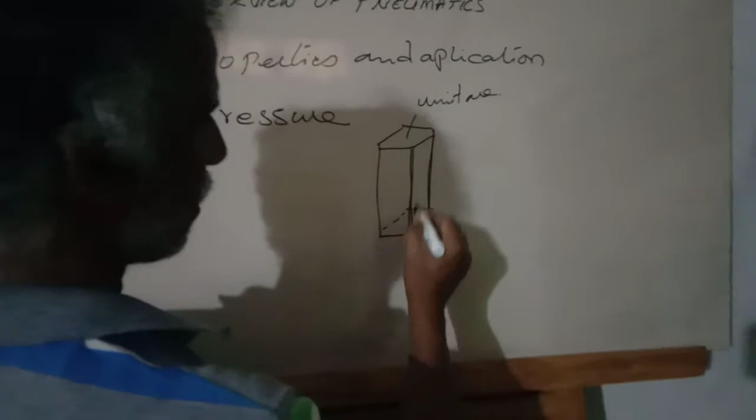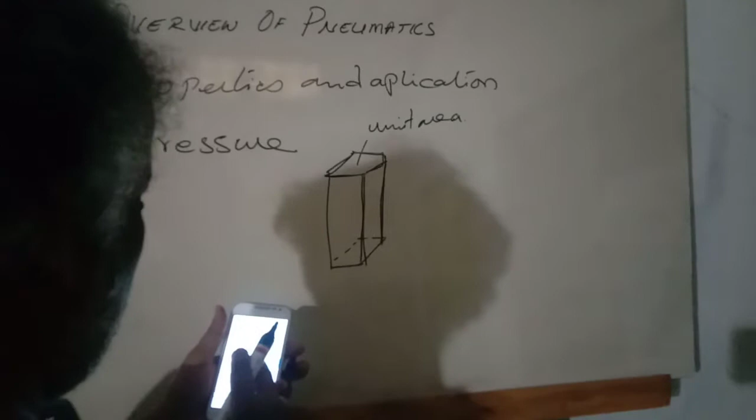Example: this is unit area. If it is a piston, a square piston or a round piston, the area is called unit area. The weight of air in the column applies a pressure. So when you put the load, the column applies pressure to the unit area. When you apply the load to this unit area, the pressure in it increases.

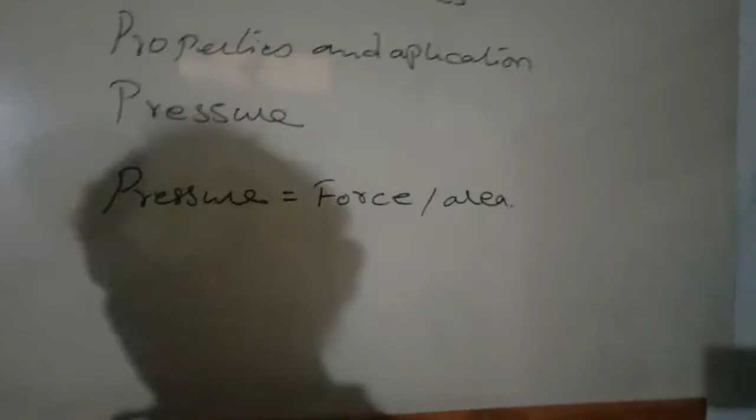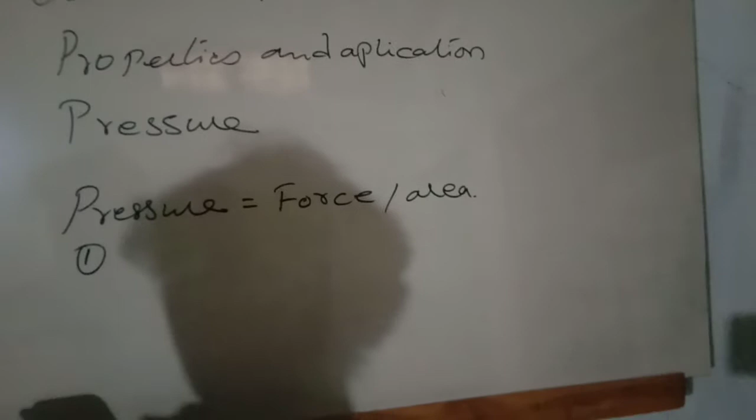Pressure is equal to force by area. The pneumatic system has three terms related to pressure that are commonly used. One is atmospheric pressure, pressure equals force by area, and we have three commonly used terms: atmospheric pressure, and the others.

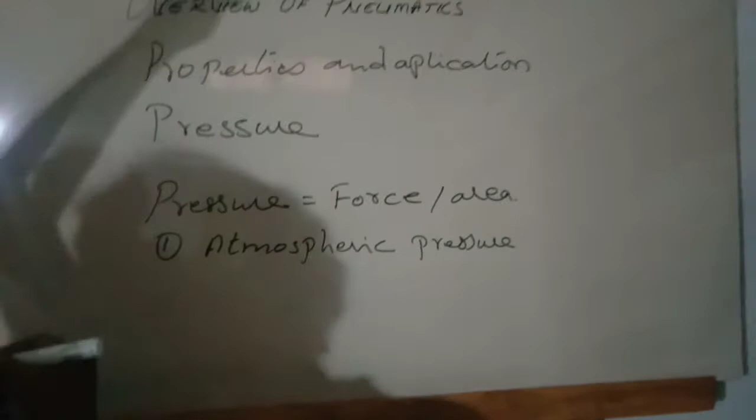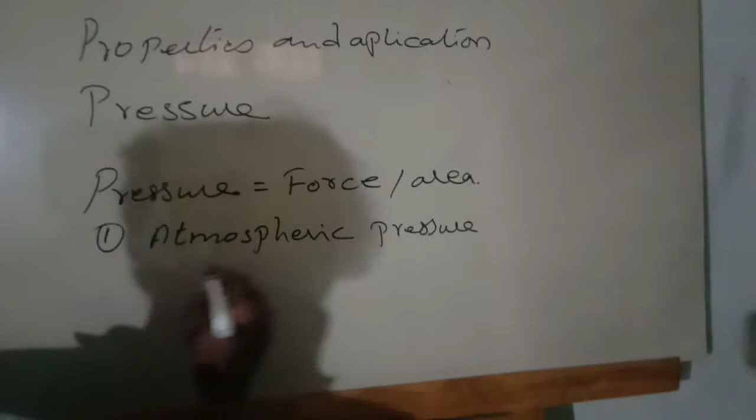Atmospheric pressure: it is a pressure caused by the weight of a column at atmospheric level, air acting on the surface. Example: you take a bucket, put water in it, and put one pipe. Due to the atmospheric pressure, water will come out.

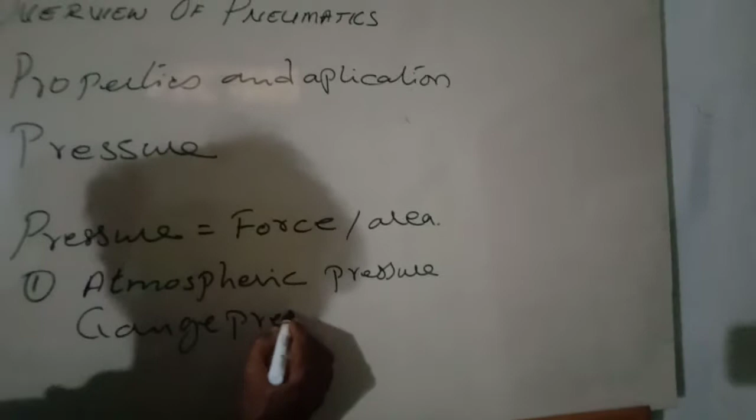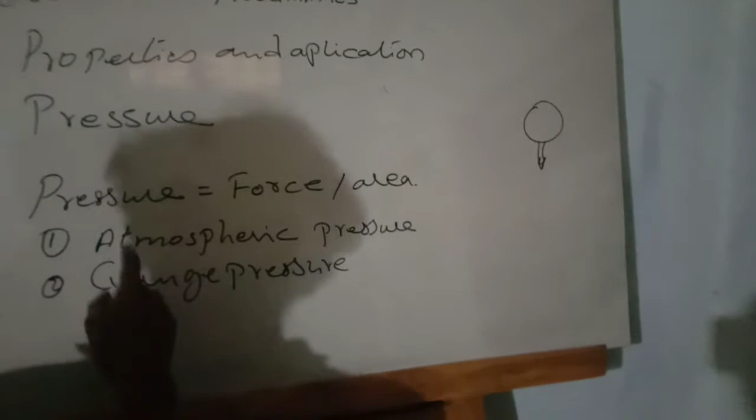Gauge pressure. For example, when you use a dial gauge in the workshop, a similar gauge pressure will be there. In the house where we have a municipal water connection, they put a gauge to check how much water pressure is coming. So this application includes three terms: one is atmospheric pressure, second is gauge pressure, third is absolute pressure.

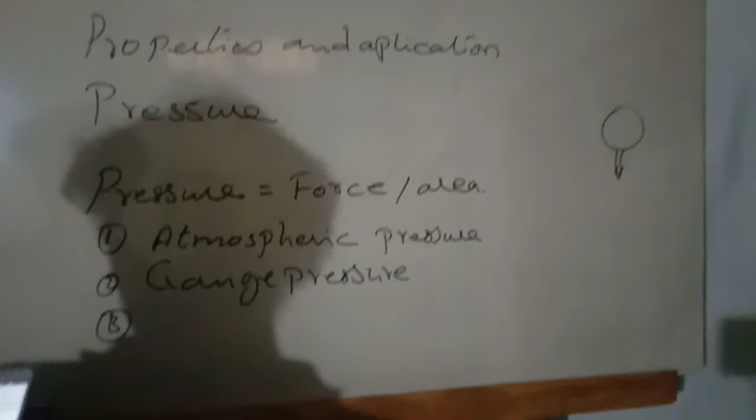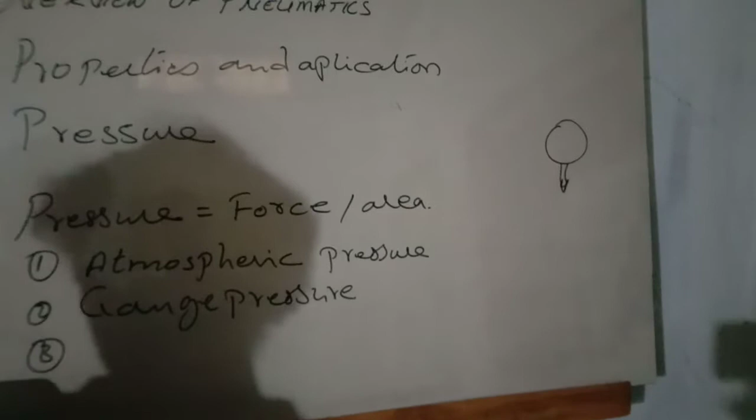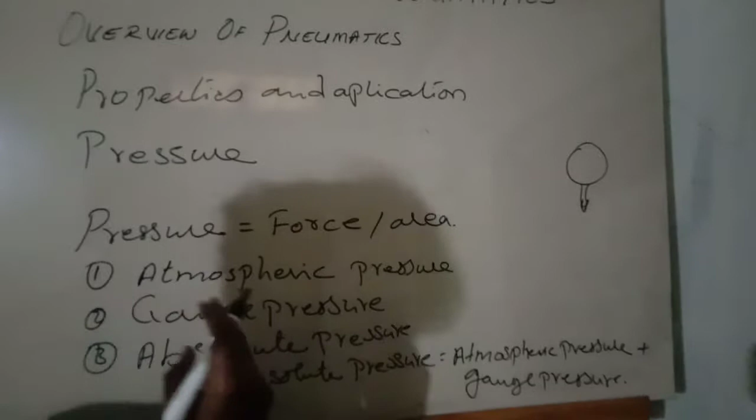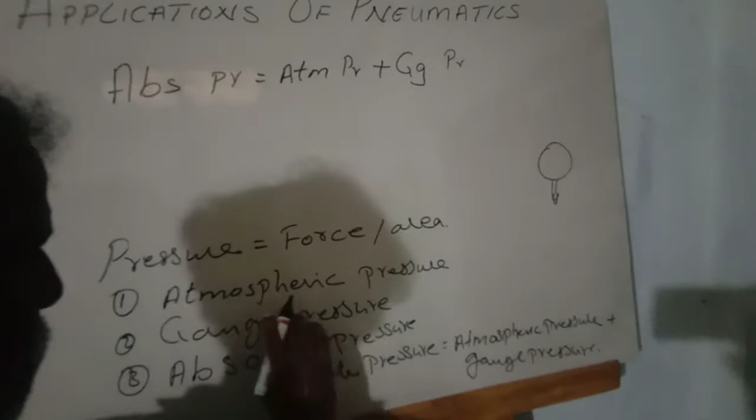Absolute pressure is equal to atmospheric pressure plus gauge pressure. Three terms: atmospheric pressure, gauge pressure, and absolute pressure. When you use the applications of pneumatics, these three terms are useful to calculate how much work can be done by the machine.

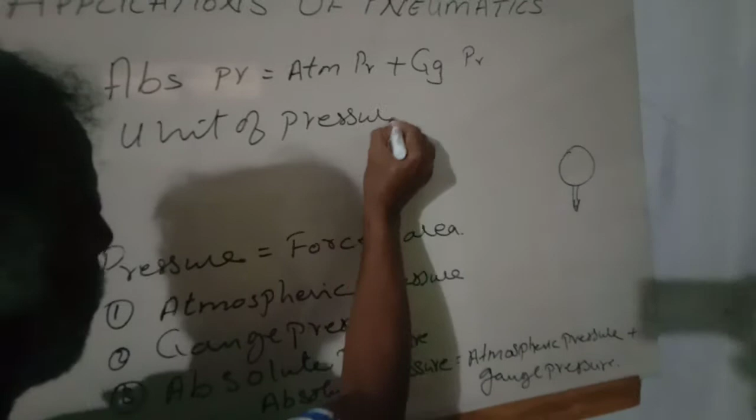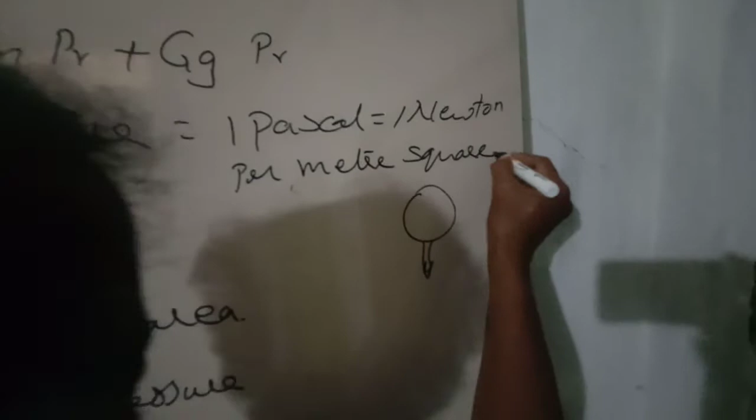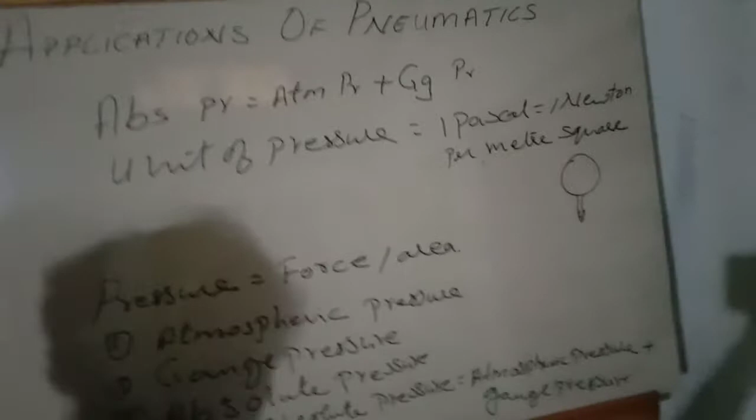Now, the unit of pressure is Pascal. 1 Pascal is equal to 1 Newton per meter square. 1 Pascal is the pressure exerted by a force of magnitude 1 Newton perpendicularly upon an area of 1 square meter, when the weight is acting perpendicularly.

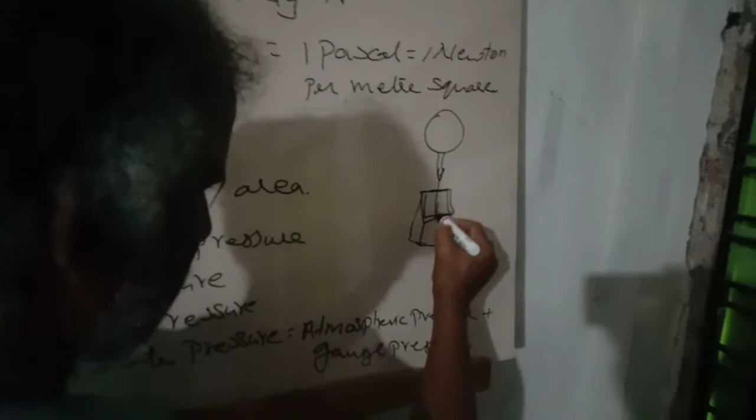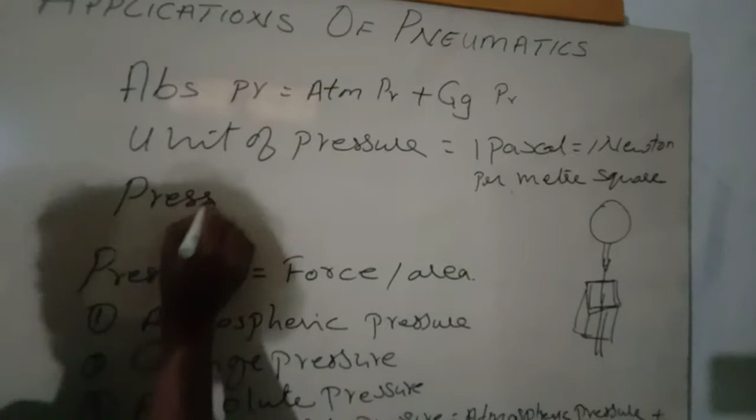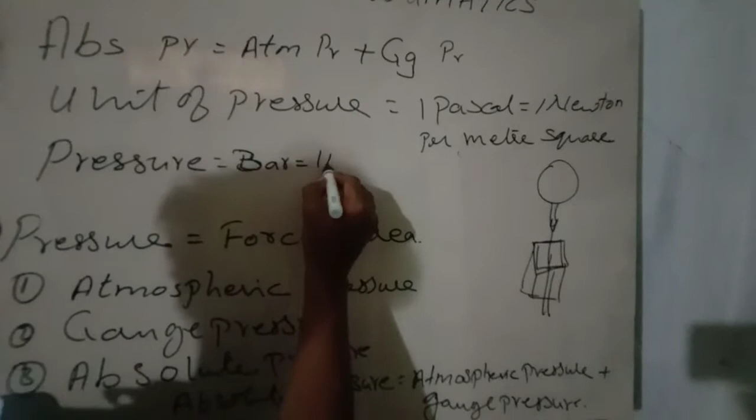Now, pressure: 1 bar is equal to 1 kg per centimeter square, approximately.

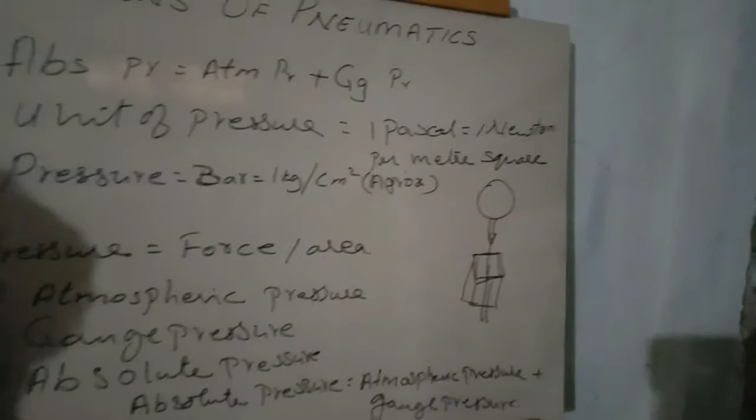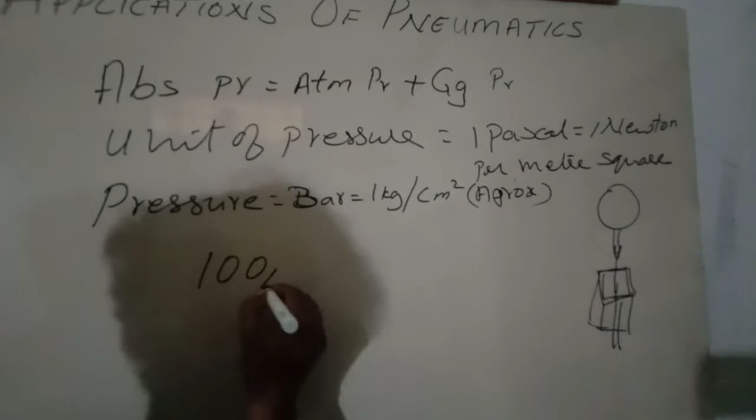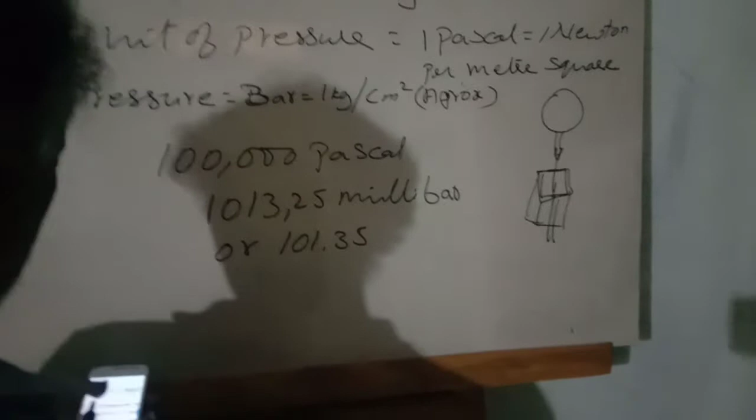Bar is a metric unit of pressure equal to 1 lakh pascals. Standard atmospheric pressure at sea level is 1013.25 millibars, or 101.35 kilopascals.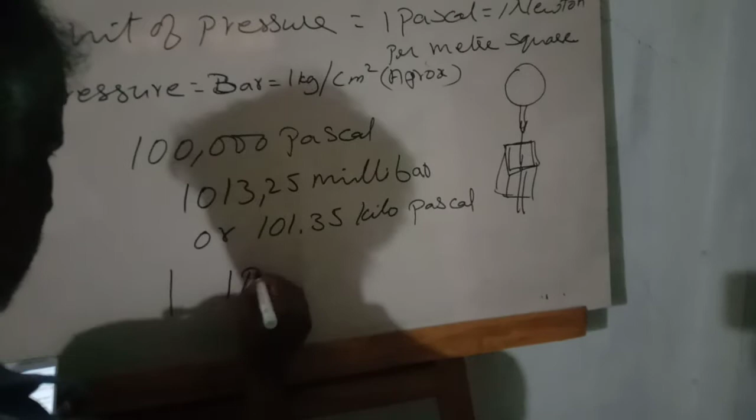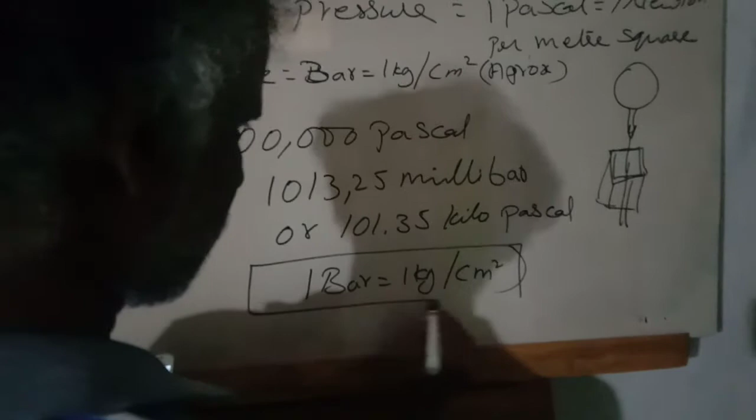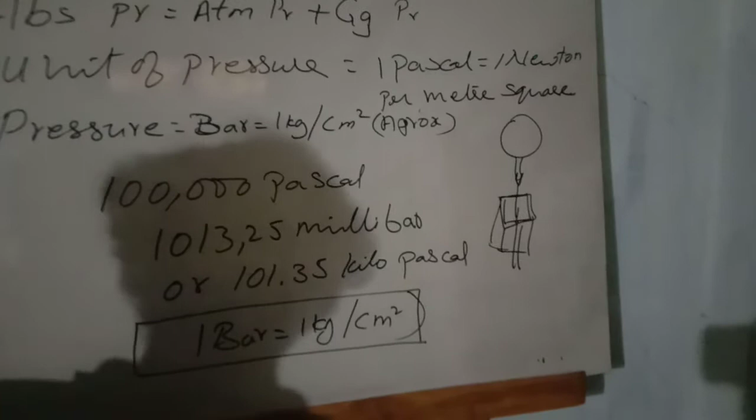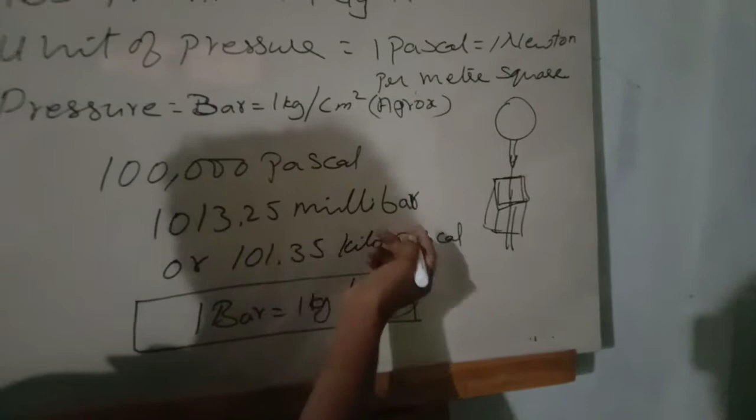One bar is equal to 1 kg per centimeter square. Bar is a metric unit of pressure equal to 1 lakh pascals. Standard atmospheric pressure at sea level is 1013.25 millibars, or 101.35 kilopascals. One bar is equal to 1 kg per centimeter square.

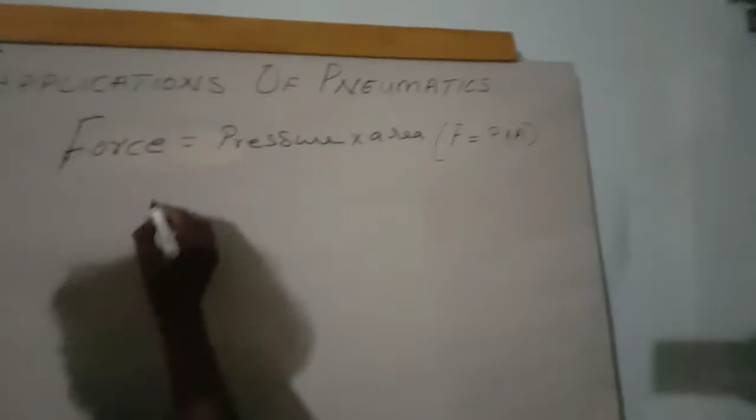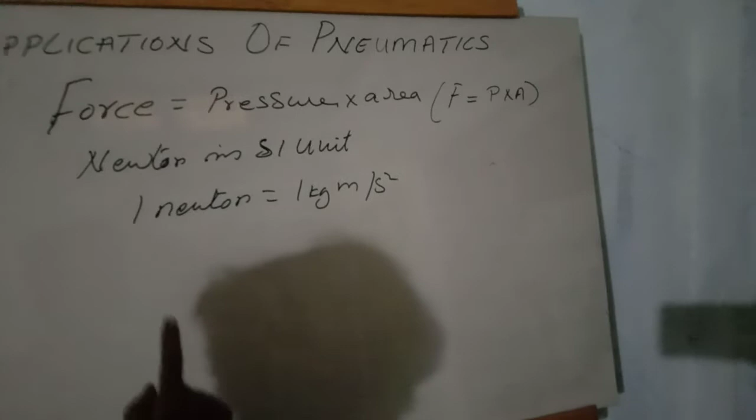Now, force. Force is equal to pressure into area, that is, F is equal to P into area. Unit of force is measured in Newton. Newton is SI unit. 1 Newton is equal to 1 kg meter per second square.

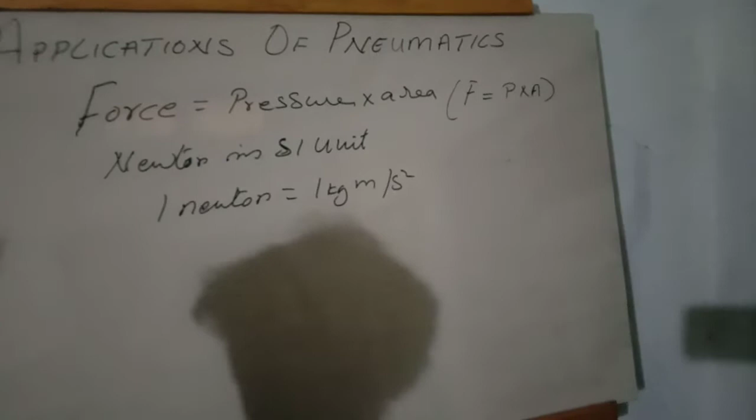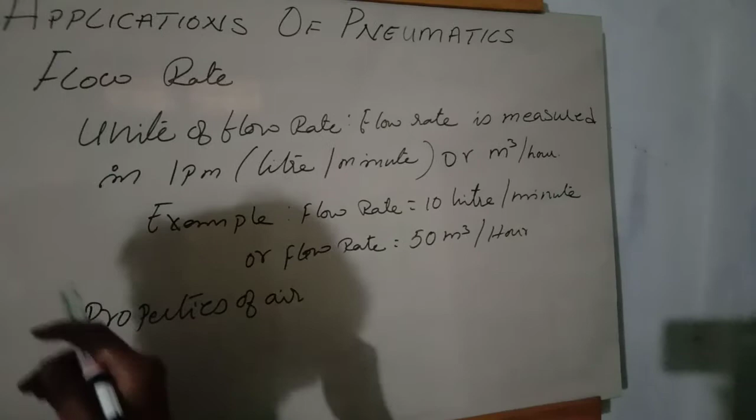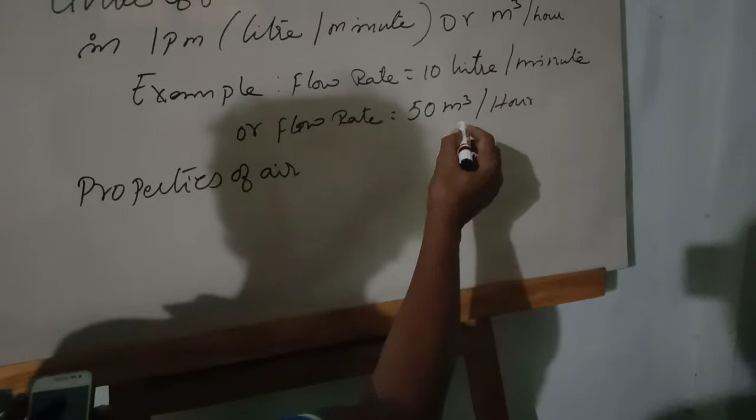Karthik, what is flow rate? In pneumatics, the rate of air flowing in the pipe or machine is called flow rate. Unit of flow rate is measured in liters per minute or meter cube per hour. Example, flow rate is equal to 10 liters per minute means it's pumping air 10 liters per minute, or it's pumping 50 cubic meters of air in 1 hour.

And this air will have properties. See, example, you breathe inside and take one handkerchief. When the handkerchief is folded and kept into your mouth, it will be cool. Then you keep it to your mouth and puff it strongly. After some time, when you see the handkerchief, it will be little bit warm, little bit hot. How does this happen? Due to the pressure and force when it is applied.

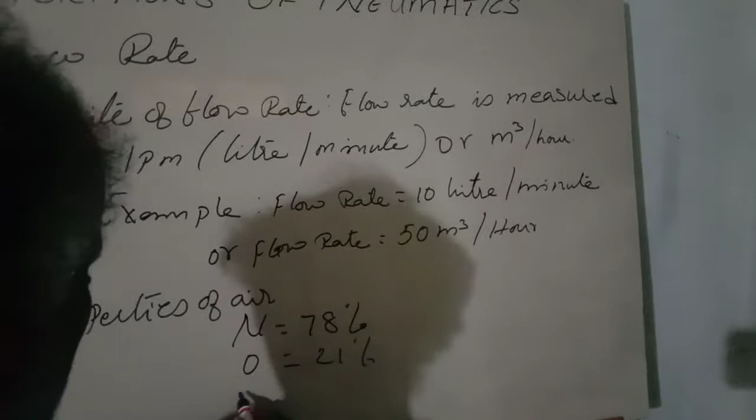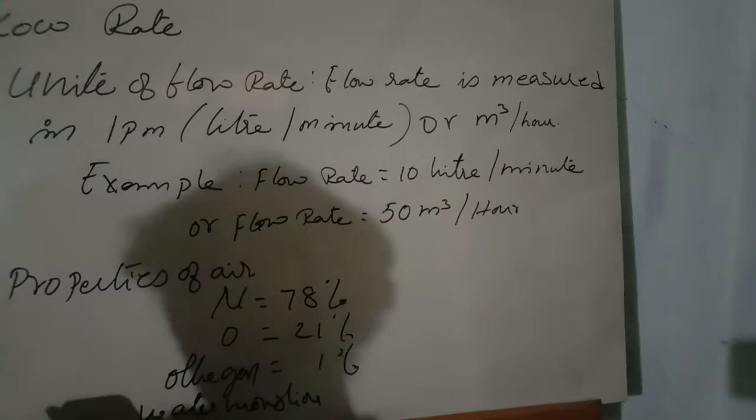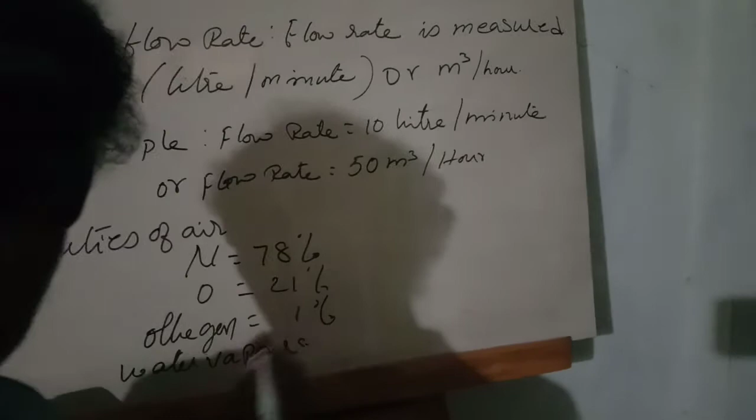So, same way, when air is working with pneumatic machines, the air should have some good qualities, properties. What are these properties? Atmospheric air possesses certain properties as follows. Air is a mixture of gases: nitrogen 78%, oxygen 21%, other gases and water vapor 1% by volume. So the air available in the atmosphere contains 78% nitrogen, 21% oxygen, other gases and water vapor.

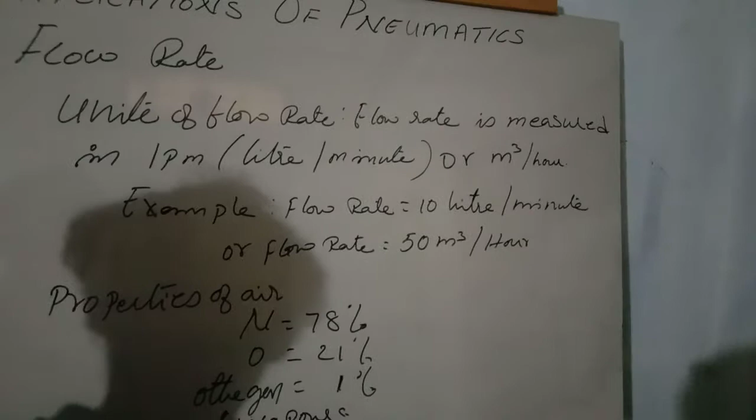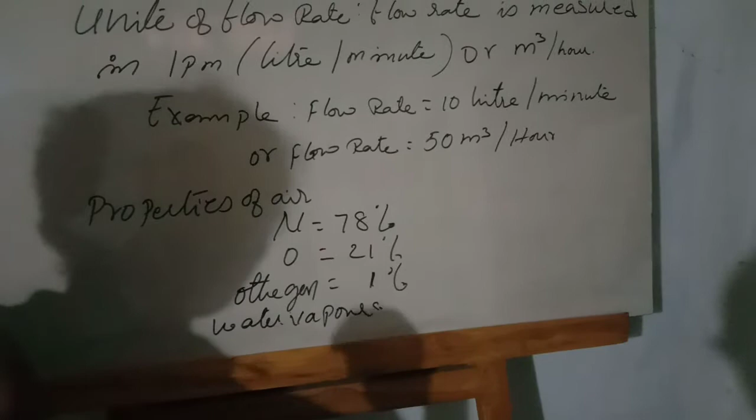So next, it contains dust particles and water vapor. Example, if you breathe hard during the rainy season, some water droplets go into the nose when you inhale, and you get a disturbance of your respiratory system. Same way, water vapor and other dust particles in atmospheric air will disturb when they enter the nose. So the first property is 78% nitrogen, 21% oxygen, other gases. Now, droplets, water vapor and other gases will affect the machine. It has to be filtered, since it contains dust particles and water vapors.

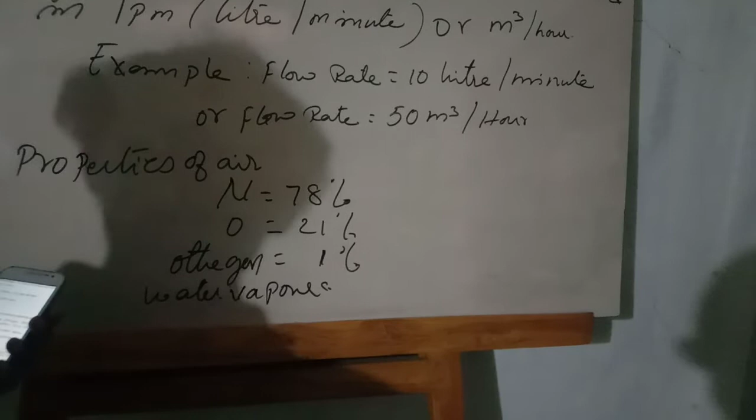The properties of air: air is compressible, meaning its volume can be reduced. For example, you take a balloon and blow air into it, and it becomes medium size. Now you hold it at the end and squeeze it to make it smaller. The volume of the balloon decreases, but the pressure of the air inside increases. So this is one property of air.

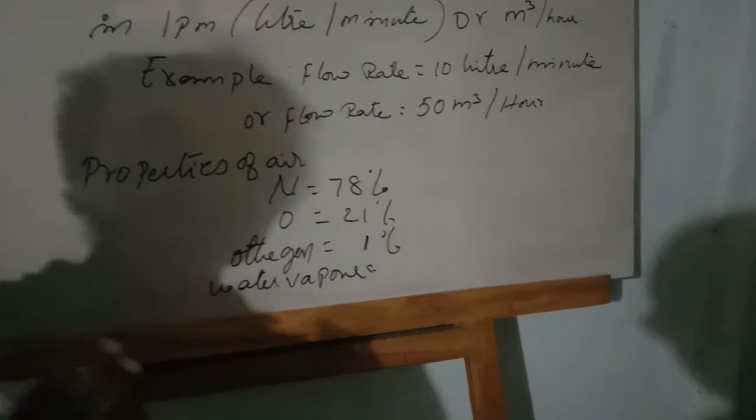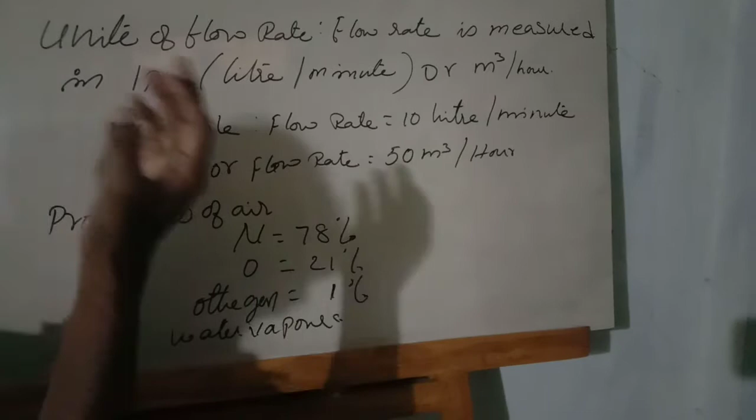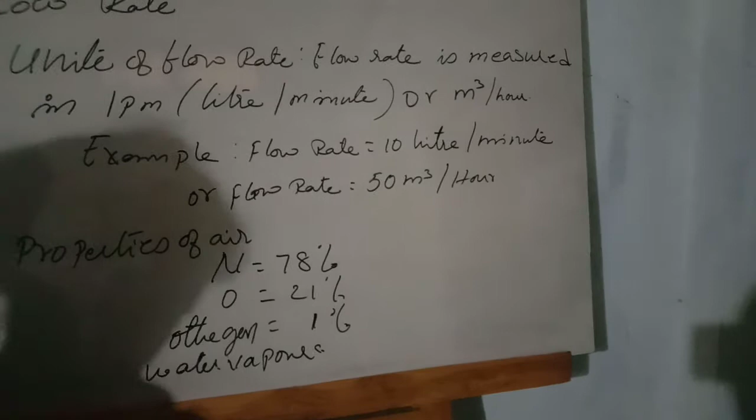And the next property is air does not burn itself. This is told because when you work with these machines, air is pumped. As I told you, take a handkerchief and blow air hard by pressure, and the handkerchief becomes hot due to friction. Air, when forcibly touching the handkerchief, becomes hot. So when this air is pumped very heavily into the tubes and the machine, due to the friction of air, the machine will get heated, temperature will increase. So air has this property, and the machine has to be continuously cooled from the outside due to the friction, which produces heat.

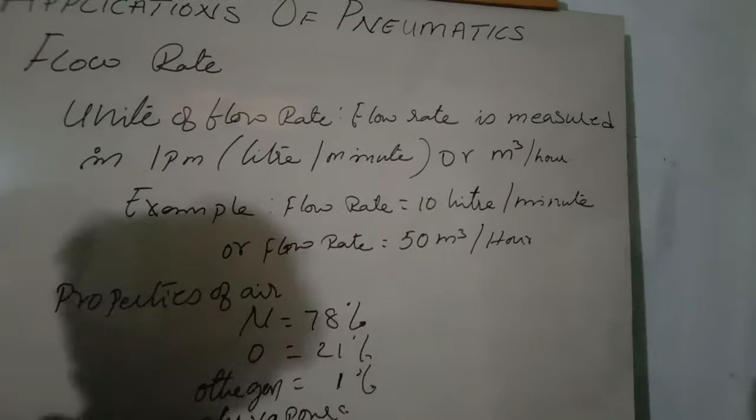Volume of air increases with increasing the temperature. Volume of air increases, see example.

That is called P1 V1 is equal to, in the previous classes in school, P1 V1 is equal to P2 V2. Okay, now.

Take a balloon, blow air into it, and take the balloon outside where there is good temperature. Example: it is summer season, blow air into the balloon in the room temperature, it will be okay. If you take it outside in the sun, due to the temperature, the air will get heat and expand. Air will expand in the balloon. So the volume is not sufficient to expand the balloon, so the balloon will blow off.

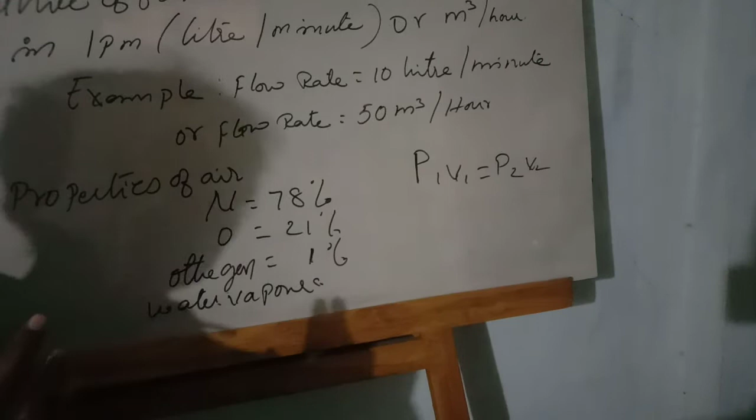Means sometimes what happens is, in a container somewhere when the air is there, due to friction air is heated, it will expand. Anything you see, when you boil water in a utensil, when the water gets heated, it will expand. Same way, air also will expand.

Next one is moisture or water vapor carrying capacity increases with increasing temperature or volume of the air. Just now I told the same way.

Pressure of air increases with reduction of volume. As I said before, when you blow air into a balloon, the balloon will become bigger. If the pressure is 10 and the balloon size is 20, so when balloon size is reduced to 10, the inside pressure will increase to 20.

When air is passing through a narrow passage, pressure drops and velocity increases. The flow of velocity here is 20, the flow of velocity here will be increasing. Means the output of air with distance, velocity will be more.

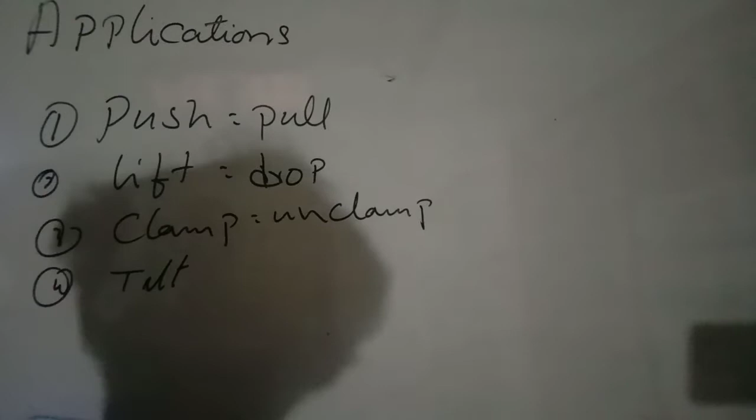Applications: push and pull. What applications does this pneumatic machine do? Push or pull any load with less effort, with less energy we are using, we can use this machine and do more work by pushing or pulling. Next one is lifting or dropping. Clamping means holding or unholding. Holding the workpiece at one place by a clamp, and unclamping is releasing. Next one is to tilt. So these are the applications we are using for pneumatics.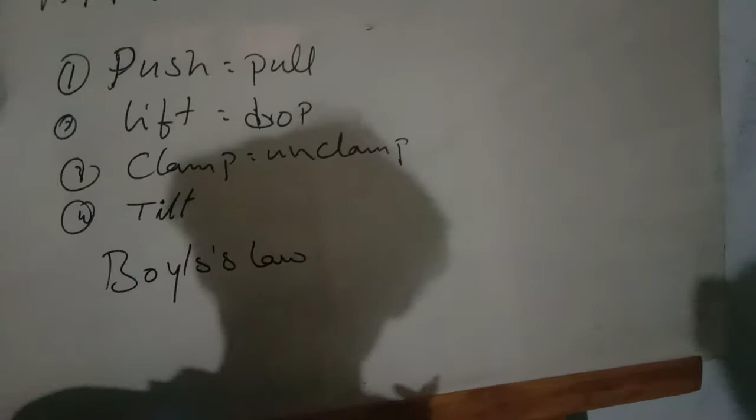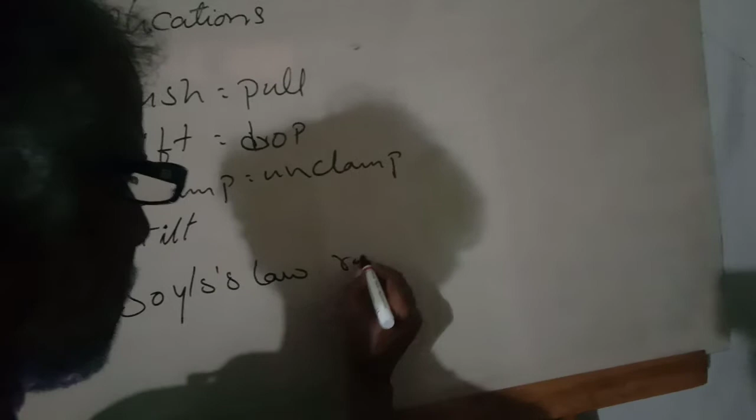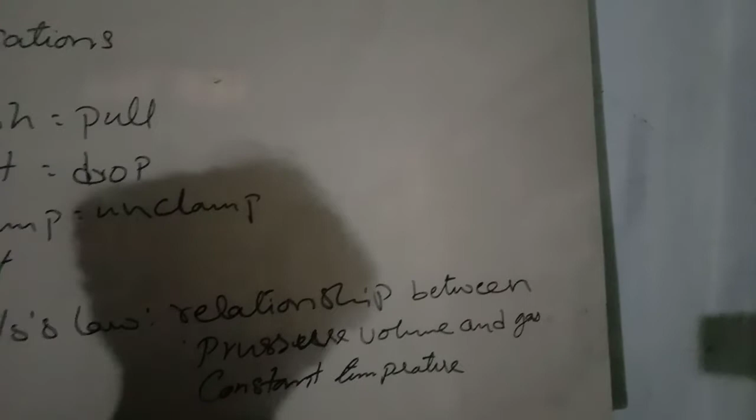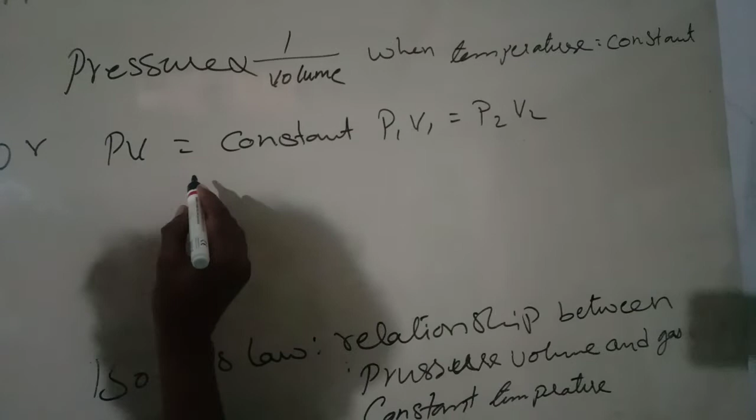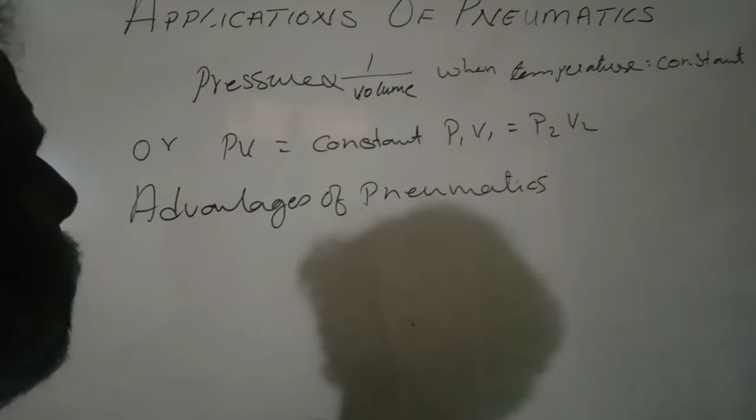Advantages of pneumatics. Pneumatics is popular in industrial applications as low cost automation because of the following advantages. Air is available free of cost. To pump the air in the pneumatic machines, we are not buying the air, it is freely available in the atmosphere. So air is available at free of cost, and air is available in unlimited quantity everywhere.

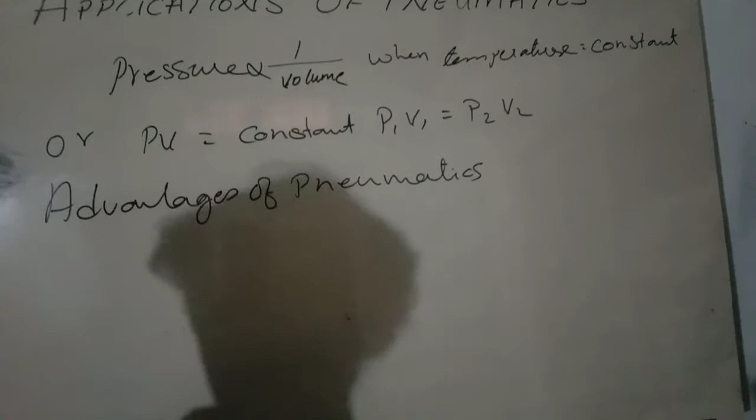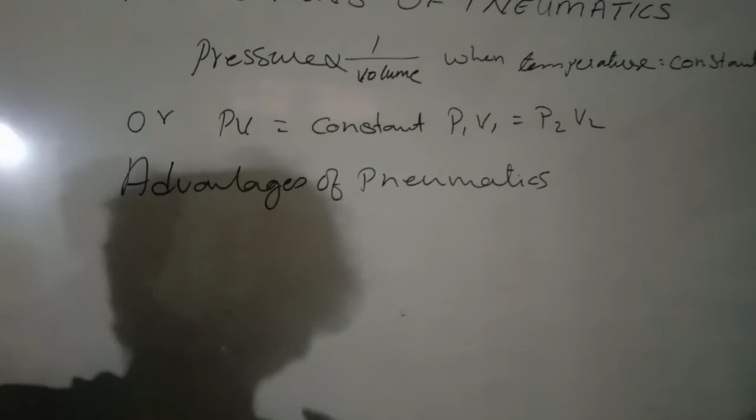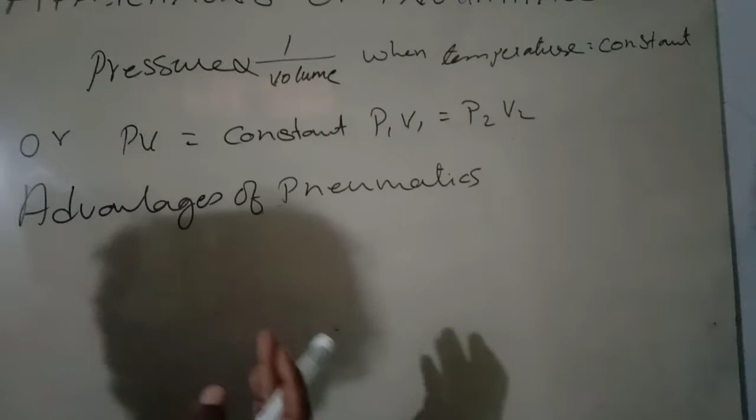Air can be compressed, pressurized and transported through pipes. In pneumatics, the free air available in the atmosphere, we are pumping it into the pneumatic machine and transporting it with high pressure through the pipelines. Air can be exhausted to the environment without any harmful effect. When air is exhausted outside to the atmosphere, it will not do any harm, no toxics will be there in it. Same as air we are inhaling and exhaling is not toxic; it is not utilizing only oxygen and living, but when exhausted out, it is not harmful for the climate.

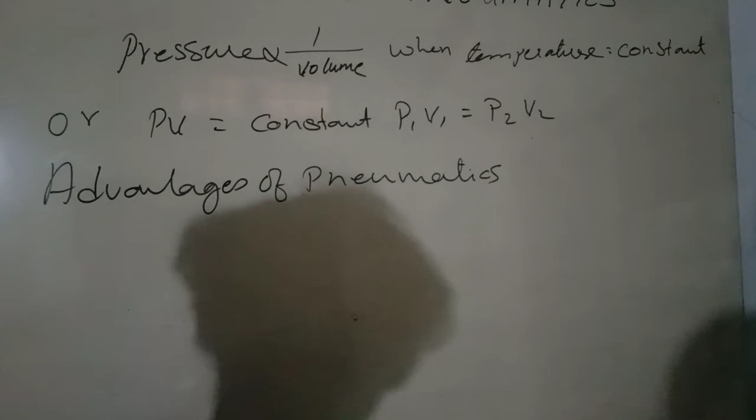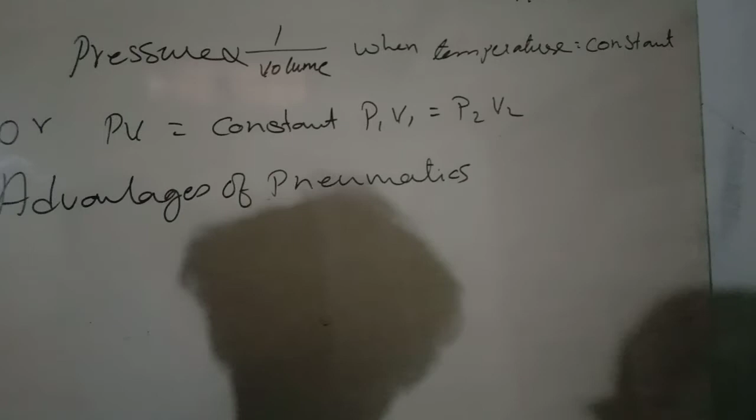Limitations. Pneumatic system has certain limitations as follows: because it is free, we cannot use it as we like, but some limitations are there. Pneumatic system is economically up to a limit of 3000 kg force. Pneumatic needs fine quality equipment to remove dust and moisture.

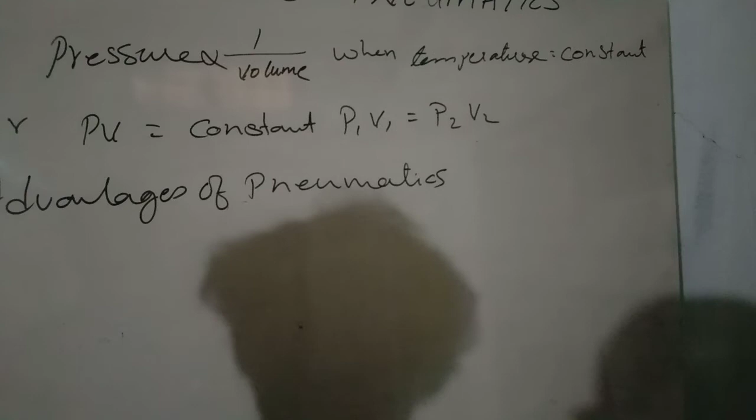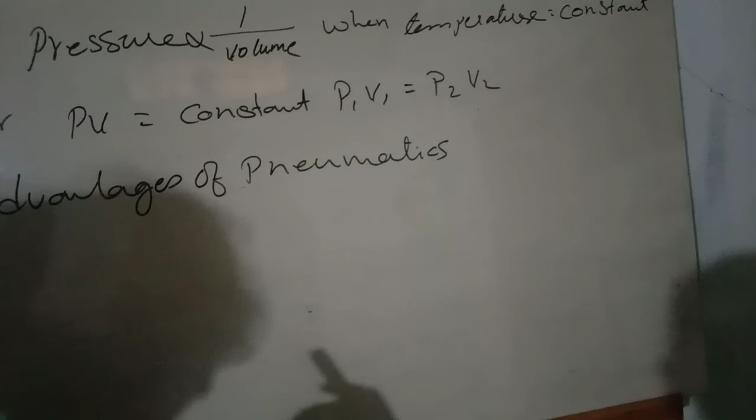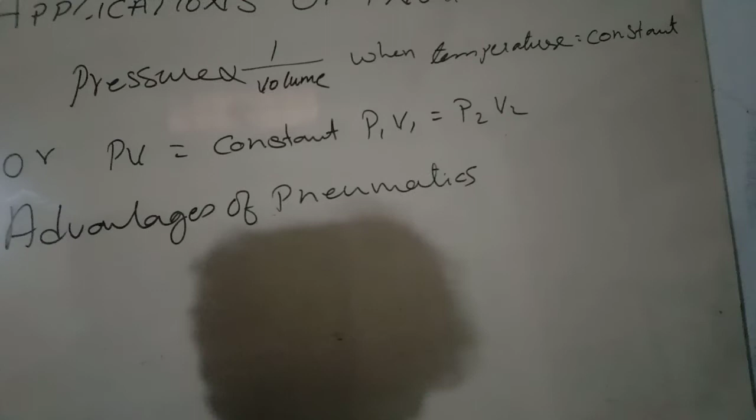So when you are pumping the air into the pneumatic machine, before that the water in the atmosphere and dust particles have to be filtered and sent into it. Special lubrication technique is required to avoid friction between internal components. So when pumping this air with a pneumatic machine, as in an air pump cycle, when pumping the air manually, to move it freely we need to use some lubrication so the moving parts move freely. So we will put a little oil on the moving part where the washer is.

Compressing air beyond 7 bar is costlier. Compressing air beyond 7 bars is costlier.